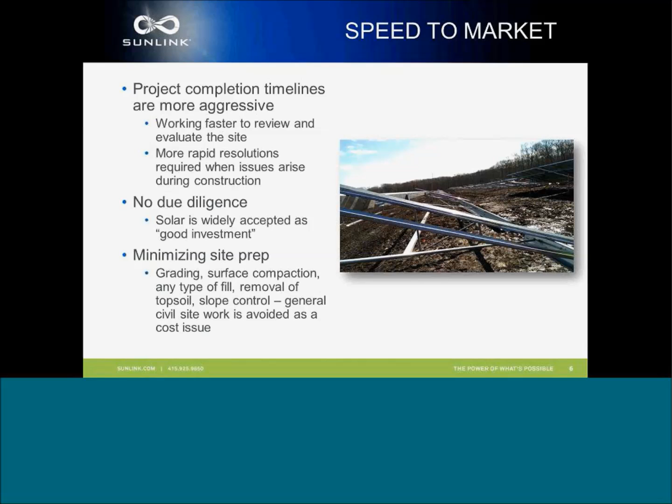Another shift that has been happening has been in the broad perception of the industry as a whole. Solar continues to seem like it's moving from being a tucked out of sight asset into, in many circumstances, a prized public possession. This is increasing the attention paid to the look of the final product, and this increased attention is creating what we see as an opportunity to provide increased flexibility and adjustability within our systems in an effort to react to the difficult terrain that we've been discussing.

Now, racking manufacturers have historically designed their systems to allow for what is deemed a typical job site. Setting aside the greater discussion of what typical actually is, we want to ask the question: why was this actually done? Well, the goal here was actually to reduce the costs passed to the customer. And although, of course, this was done with the best of intentions, what this has actually done in many instances is create an inability to accommodate unknown variables in more extreme cases.

In turn, this has actually increased the time and costs in difficult projects. Then, unfortunately, it's left installers requiring new parts and delays in designs, and dealing again with change orders. The difficulties then have had an opposite effect on installers trying to solve problems on the fly, increasing the annoyance of slow change orders and an inability of the systems to truly adapt to what's going on in the field.

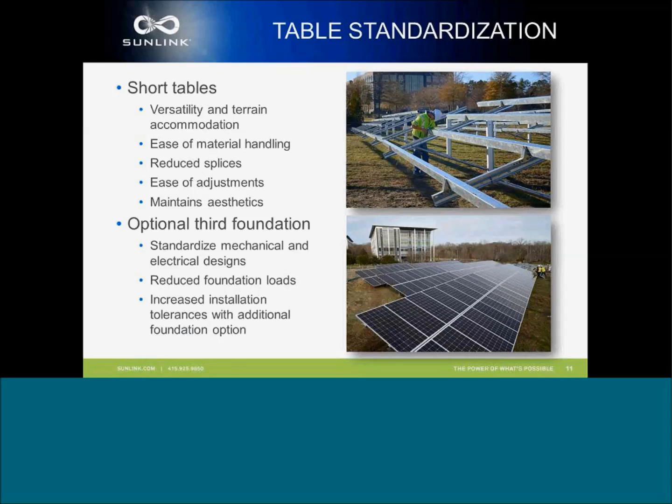The third foundation post also potentially reduces foundation loads, allowing for versatile foundation design and in some cases increased foundation installation tolerances. Over the last several years, we've also seen projects move more and more into undulating or hilly terrain.

The ability of standardized tables to accommodate slopes and rolling terrain not only improves mechanical installation efficiency, but also significantly reduces civil work. Civil work, as we all know, is time-consuming, it's expensive, and in some cases it can actually complicate site conditions with improper compaction or loose surface soils and debris.

Standardized tables also increase land use efficiency. We are now able to generate relatively more power on a given site by installing with existing conditions instead of avoiding slopes and hills. Land utilization also increases on uniquely shaped sites by fitting tables in the small corners and small portions of the area, all with the exact same table design.

By reducing the civil work and increasing land use efficiency, standardized tables are able to reduce the overall levelized cost of energy for each project.

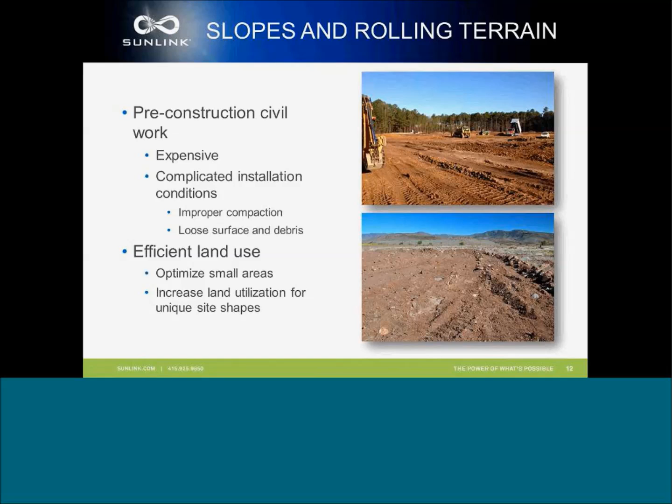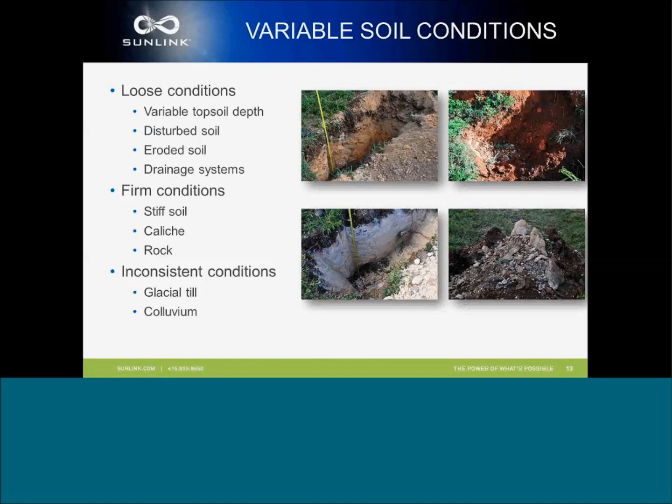During pre-construction pile testing, our PowerCare crews commonly see multiple soil conditions that would affect the foundation design. Loose conditions can be caused by variable topsoil depth, disturbed or eroded soil, and drainage systems. Rock is consistently found in the northeast, while caliche is encountered in the southwest. Similarly, cobbles and boulders are frequently encountered in glacial till in the northeast, as well as in colluvium and commonly encountered in the west. Even when soils are consistent, obstructions and their respective depths cannot be accurately predicted.

One obstruction on a commercial site can carry significant costs and time for mitigation. Similarly, frequent refusals on a large job site will have a significant impact on installation cost and overall progress.

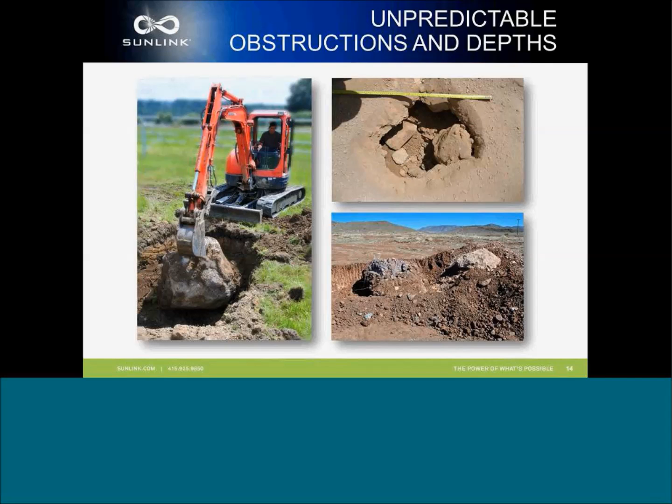For example, in the image on the left, you see one boulder encountered by our power care team on an otherwise clear site. But this one boulder required additional machinery and affected the construction of multiple racks. The top right image shows an attempt to drill into the subsurface for a concrete footing after refusal. As is common in the desert Southwest, the surface is compact, but underlying soil is loose, easily caved, and filled with voids from displaced cobbles and boulders.

So how do we deal with these common situations? These images show the typical reactive strategies for mitigating these types of refusals on job sites. The image on the left shows an excavation for a concrete collar installation, while the image on the right shows attempted drilling. Both strategies are common on job sites because they are the easiest for installers to perform on the fly. However, both solutions are expensive, they both require extra machinery and significant time. They're both labor-intensive and they significantly slow installation progress.

These examples illustrate the importance of standardized, interchangeable components and foundations for proactive on-site mitigation work. Interchangeable foundations ease the burden on installers, create more predictable pricing structures, and increase installation efficiency. So taking the market demand that Nick discussed, as well as the lessons learned by our power care teams on site, SunLink continues to develop innovative product and service solutions to ease solar installation and advance solar adoption. Sarah will now discuss these specific product solutions and how they are incorporated into system designs and installation.

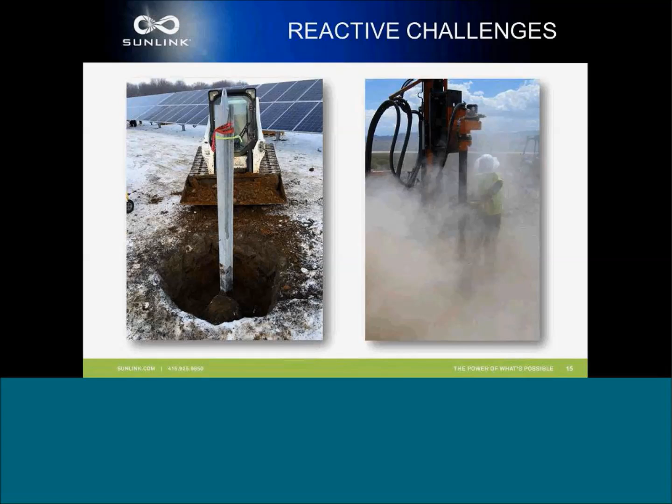Thanks, Keith. So now I'd like to talk about the product solutions that we're using to solve these issues that are encountered in the field.

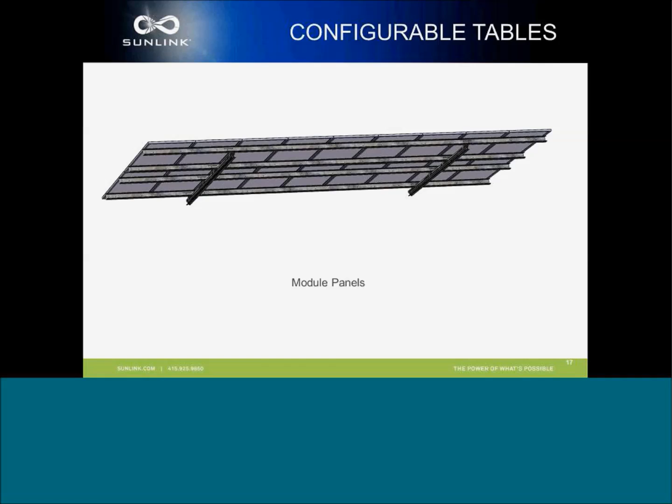This is kind of our base solution using 2-pile driven posts. As Nick mentioned, we've seen portfolios spread throughout a variety of regions, which requires us to design our system for a variety of environmental conditions. For example, this 2x9 table that you see here might be used for a project that's on the West Coast. But using this same 2-post design, we would need to shorten the tables in order to accommodate a project in the Northeast.

By adding a third foundation in the center of these tables, we can use the same 2x9 table size for a project with these higher snow loads in the Northeast. This allows us to standardize tables across a variety of sites and simplifies the mechanical and electrical layouts across the portfolio.

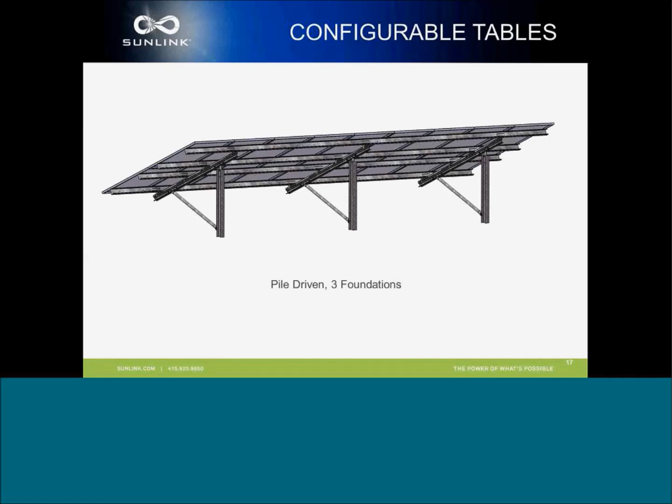So using this same set of top panels, we can then provide solutions for a variety of different soil conditions. As you can see here, we have a table that uses either ground screws or helical foundations. The ground screws we would use in cases where we encounter bedrock at shallow depths. We could use this solution only on certain portions of the site. And helicals, which we'd use in cases where we encounter loose soil. This could be a swap-in solution on just a couple foundations on a site.

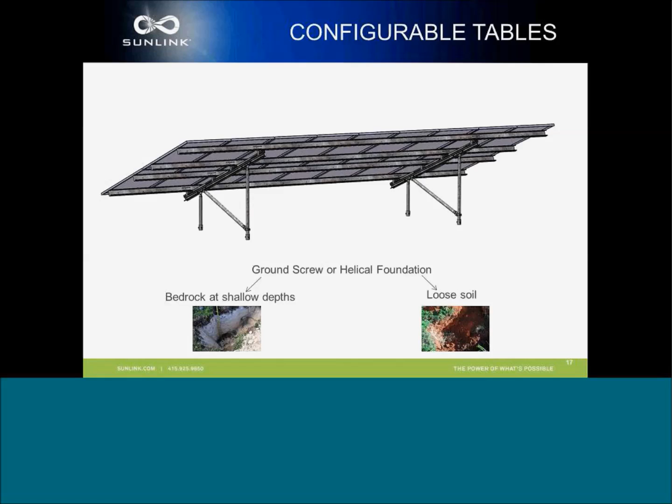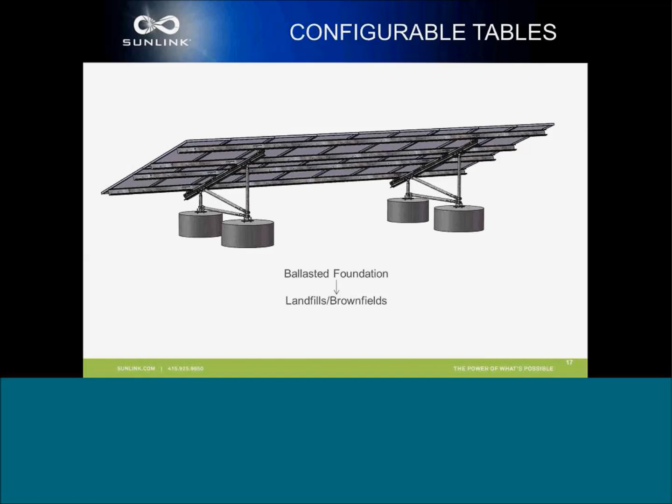So again, we're able to provide another foundation option using the same set of top components. In this case, we have a cast-in-place ballast foundation. Typically, you'd find that you'd use this solution on landfills or brownfields, but we can also use this as a swap-in solution on site. So as you see here, this table has one pile-driven post and a swapped-in set of ballasted foundations. We could use this in cases where we encounter pile refusals on boulders or bedrock.

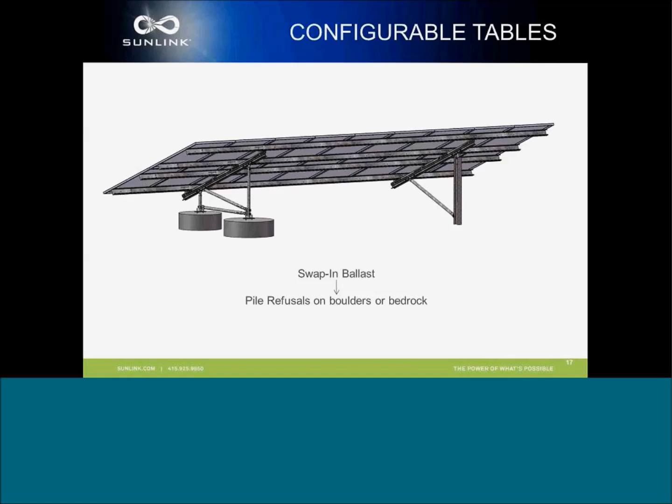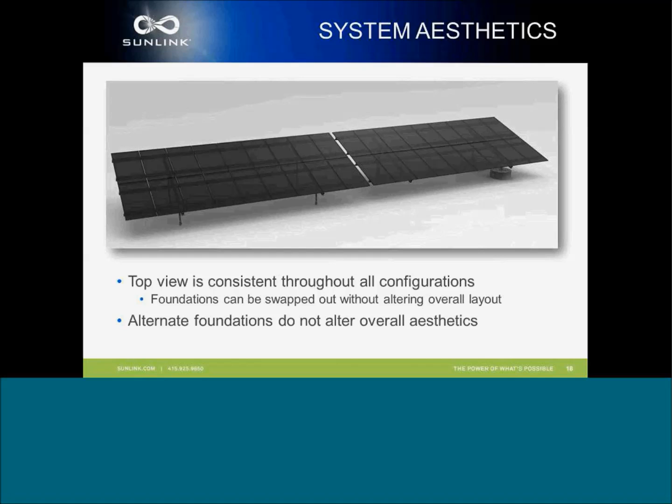As you can see, the top view is consistent throughout all these different types of configurations, so you can swap in different foundations without altering the overall layout. Again, from this image, you can see that switching out these foundations doesn't really alter the overall aesthetics. Since you're using the same set of components for the top panels, really the tables look very similar across the site. So as projects are also moving faster to the installation stage, there's increased need for having additional flexibility in the system.

If a last-minute module change is made, we're able to accommodate this by the hole pattern you see in this image. So if a module's changed and the hole pattern is different from the previous one, you're able to swap, just move the location of where you're installing the panels on the system. Using these two different modules, we're able to accommodate that by using a different hole pattern.

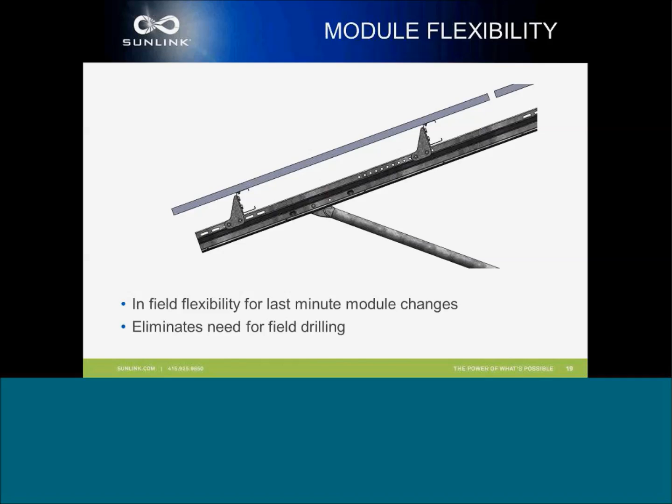We're able to accommodate up to a 20% east-west terrain with the existing components in our system. As you can see here, we're able to accommodate either a constant slope or rolling terrain up to this percentage. We can also swap in the other foundation options we went through earlier, so we can accommodate any of these different foundation options with a variety of slopes.

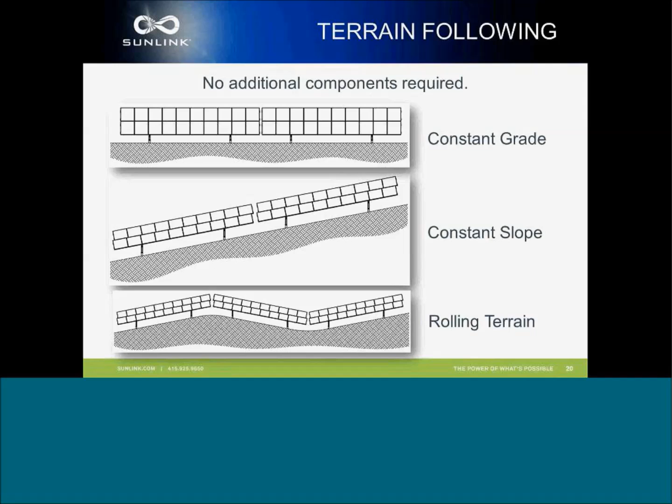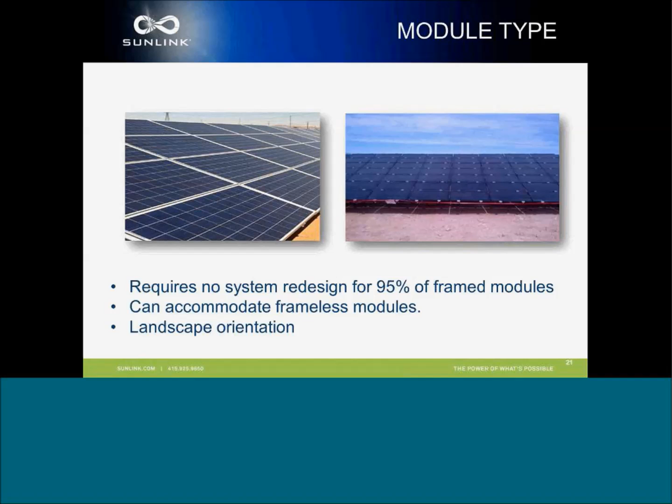Although we've seen a shift to portrait orientation due to the lower overall system costs, we're still able to accommodate other types of orientations, either using modules in landscape if they're framed, or also accommodating frameless modules.

We've talked a lot about the flexibility built into our product today, but we're continuing to work on new innovations based on feedback from the field. Our customers and SunLink's team of PowerCare installation professionals are our most valuable resource when designing the next generation of this solution. If you have thoughts about product features that would make your projects more successful, we want to hear about them. Our team looks forward to sharing future design evolutions with you. Thanks, and now I'll open it up to questions.

Okay, so it looks like we have a few questions that have come in today. We'll start with the first one: what are the common ways to troubleshoot refusals during installation? Keith, maybe you can take that one.

Sure, absolutely. When we're on job sites and we encounter refusals, first we go through a checklist so that we report proper information and understand the current situation. First we want to look at the depth achieved by the driven pile. That greatly affects what solution we're going to provide. If it's very shallow, the mitigation is going to be different than if a pile is driven very deep, and a lot of that has to do with how much we're going to disturb the soil.

So after we know the depth of the refusal, we then want to review the geotechnical report provided for the site and the pull test report, just to ensure that piles have sufficient capacity. And then we go through our list of potential solutions.